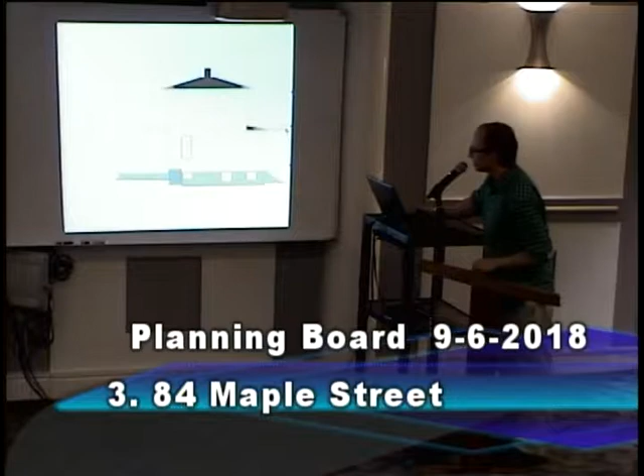Okay, we've got something. Looks like some of the grades here are washing out a little bit, but this is just a side view of what's being done. So there's an existing first floor addition, and the addition of a second floor master bedroom and bathroom, and this deck out the back, and the powder room on the first floor. And then this is where the lot is situated, this is what I noted around the house and its nearest neighbors.

Has this gone to the HRB or not? Yes, it's past the HRB. Really? Okay.

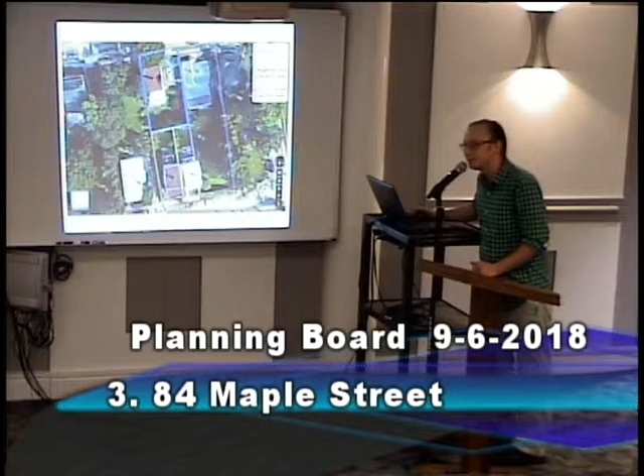All right, very good. Any comments from the board? Any comments from the public? All right, so I'm going to move that we close the public hearing. Second. All those in favor?

Thank you. So I have a resolution here I'll read. Village of Dobbs Ferry Planning Board Resolution granting site plan approval for the construction of an addition to an existing single-family house together with related site work, 84 Maple. Whereas Desan Davis and Ilya Bomash, owners, have applied for site plan approval to construct an addition and make related site improvements at 84 Maple Street, denoted on the tax assessment maps as section 3.90, block 51, lot 3, and located in the MDR1 zoning district.

Whereas the following plans and documents were submitted as part of the application, there's a list here of roughly 20 documents. Whereas the planning board is familiar with the site and surrounding areas, and the proposed improvement plans at the meeting of September 6, 2018, held a duly noticed public hearing and all comments were considered. Whereas the planning board has reviewed the staff report prepared by James J. Hahn Engineering dated August 29, 2018 for the subject application. Whereas the proposed improvement to the single-family property is a type 2 action under SEQRA and is therefore exempt from further environmental review.

Now therefore be it resolved that the planning board of the Village of Dobbs Ferry herein grants site plan approval for the subject application conditioned on the following. All applicable provisions of the village, county, and state regulations shall be met, and a site landscape plan shall be provided for review and approval of the village's consulting planner. Prior to the issuance of a building permit, all required site plan and engineering review fees shall be paid, and all items in the village consulting engineer's memo dated August 29, 2018 shall be addressed to his satisfaction.

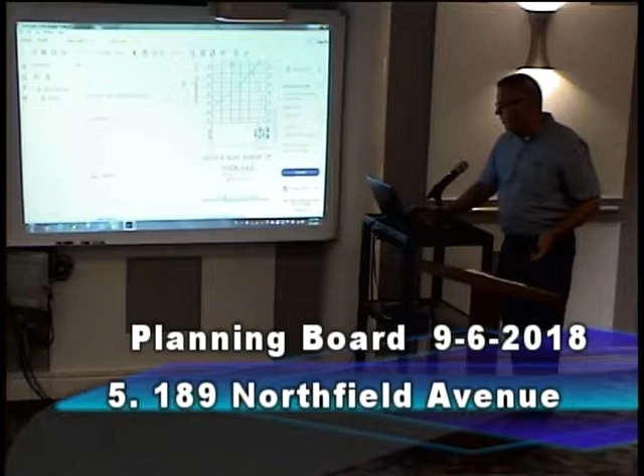But the overall grade of the driveway is definitely not steeper, it's about 10% less. And Mr. Chairman, the last part of that is the plateau or the platform, that's how you get in and out of the garage, and that's a concern. We're concerned that someone pulling into a garage at an angle that's pretty steep is pretty challenging, and then backing out on something that's pretty steep too.

While there's a section that is, like you've shown in your profile, very steep in the middle, that turning around area, we're concerned that the car can't really back up, turn around and pull forward again. One other feature of this plan is there is additional maneuvering space between here and here, because this edge of the driveway at the retaining wall provides more area, distance from the garage down to here. If you look at the existing plan, you can see the driveway is up here, down the road. The driveway's gonna be down here, so that we think would help that situation.

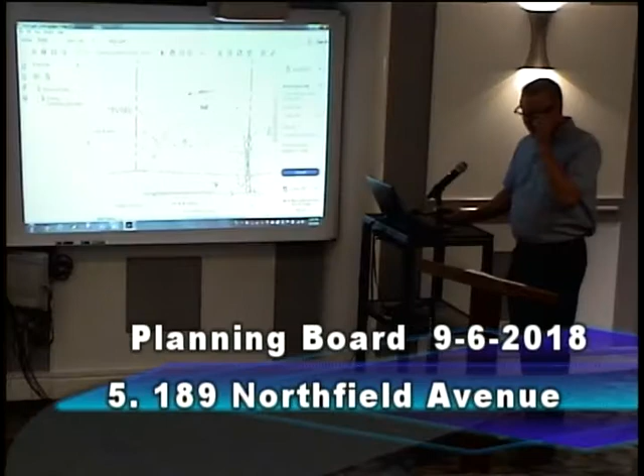I mean, George, that's the trade-off, right? You're trading the flat spot at the top for a lesser slope in the middle, which is the least bad solution, because meeting that 14% grade is not happening. That's well put, that's exactly it. And it's not ideal, I will tell you that, just being reminded of it tonight.

I've never seen a steeper driveway in this situation, this section right here, it's over 30%. And it's wet. I think they'd struggle to get up here, not even in snow, but just wet.

Now, what about the agreement with the village for the structures that are on village property, going forward? Yeah, we'll have to have one. Okay, but that hasn't been resolved. No, not yet. Any approval of this would be subject to the Board of Trustees approving an easement for the homeowner to maintain it, with agreements, insurance, everything like that. That would be subject to the board of trustees approving it, any site plan approval.

And I suppose the question of not getting to this garage has come up, just parking. Currently, they were actually parked in the garage tonight, but a lot of times we've seen them park here, but they understand that they will not be parking here, with the current situation, so it'll be too uncomfortable.

I mean, many houses have, you basically park at a lower level than the house, right? So it was built like this, and we're struggling with this, and I just wonder if it makes sense to continue trying to improve a very bad situation, as opposed to biting the bullet and putting a garage with a deck right at the street level. Yeah, and I don't think that's possible, the space is great, to put a garage at the street level. I don't see that at all.

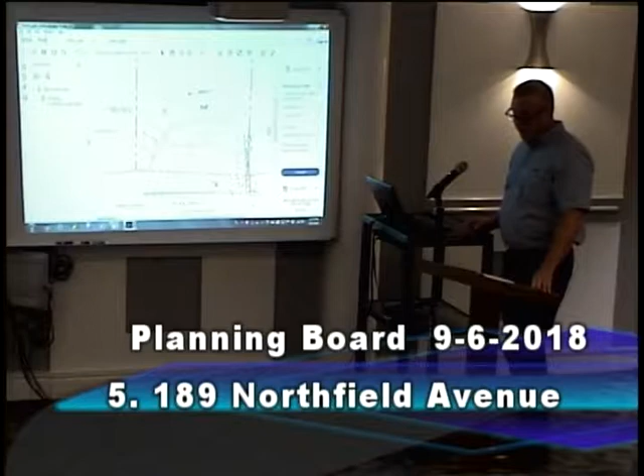When I first looked at grading, I said, you're doing a lot of work here, spending a lot of money, and it's still not gonna be that great. I explained to them how you're taking a very steep slope with a relatively flat upper area and using that to moderate the slope throughout. So you're not gonna have this flat area - you're just not gonna put a basketball hoop up there or anything like that. So the client's aware of the situation.

All right, so I think you've gotten some direction about some additional drawings and so forth. George, do you have any other recommendations? We're basically gonna just do a little more study till next time. Correct, that's what we would recommend, just because a couple inches or a foot one way or another makes a huge difference.

So if it doesn't work on paper, then trying to figure it out in the field is gonna be tough. And you probably would do some adjusting then too.

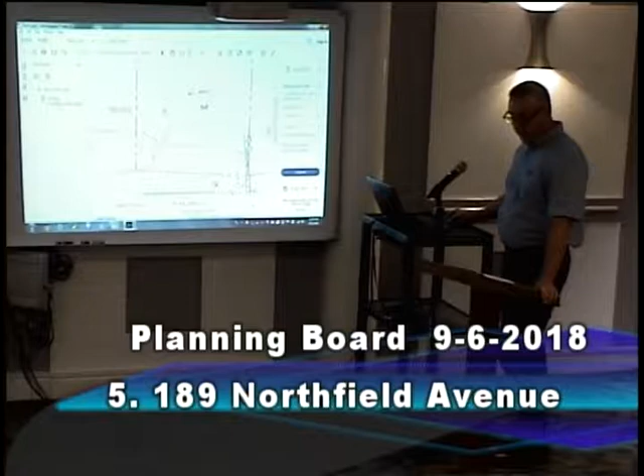So would the board consider a conditional approval as long as the village engineer is happy with the final grading up by the garage? We don't have a resolution, so I would go through one more step in the process - we can close the public hearing, so then it's just a formality for next time. So basically you'll be coming back, we'd ask George if he's comfortable with the stuff, and we'll have a resolution for you.

All right, so I'll make a motion to close the public hearing. Second? All in favor? We can assume that nobody from the public wanted to speak on this. All right, thank you very much. See you next time.

All right, our next item is 100 Main Street, continuation of referral from Board of Trustees for site plan review for proposed additions and renovations. So this is a pre-submission conference.

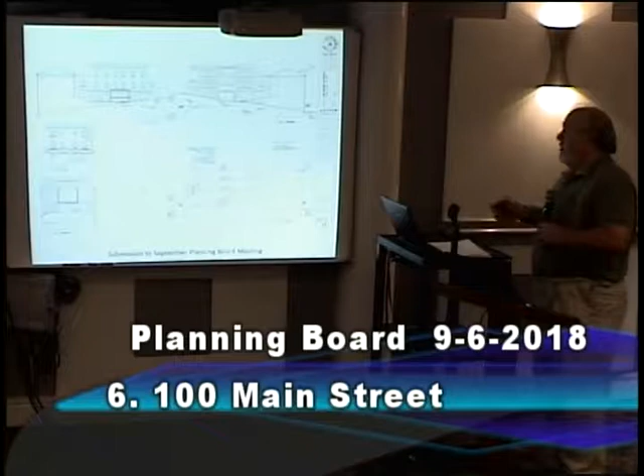We were trying to be pretty clear at the last meeting that we were not yet talking about any architecture. I know there were concerns expressed in terms of continuous facades, so there are things that can be done to break that down. As a point of reference, there are buildings on Main Street that are the width of these 3 bays right now with one facade that goes across.

On Main Street - right, it's on Elm Street, visible from Main Street, the Main Street address. So the idea of breaking it down to scale was why we did what we did with not having this be one structure. The idea is that we'll be able to go further with that once we have some idea of where we're headed.

Do you mind recapping the parking requirements and units?

We have 2 concepts laid out. One is for 3 residential units that are duplexes in the new building being added. There are 2 residential units in the existing building, so the lowest number we would have is a total of 5. Those 3 units are larger 2-bedrooms in the proposed new building.

The other alternative is that we would do 4 units in the new building with 2 2-bedrooms and 2 1-bedrooms. So we know what the needs are in the community - are we doing a better job with more smaller units, or with 3 larger units? It does trigger questions about parking.

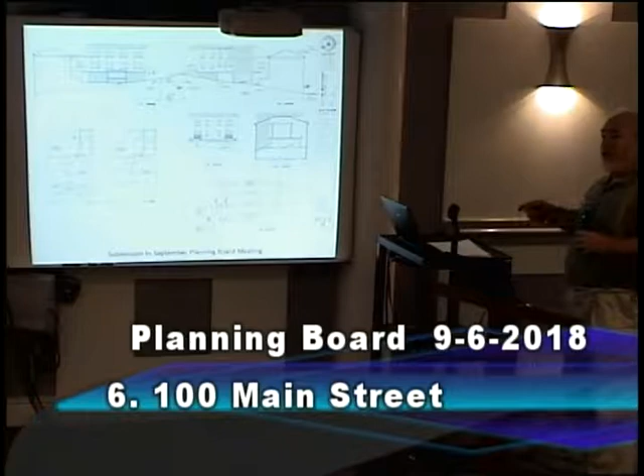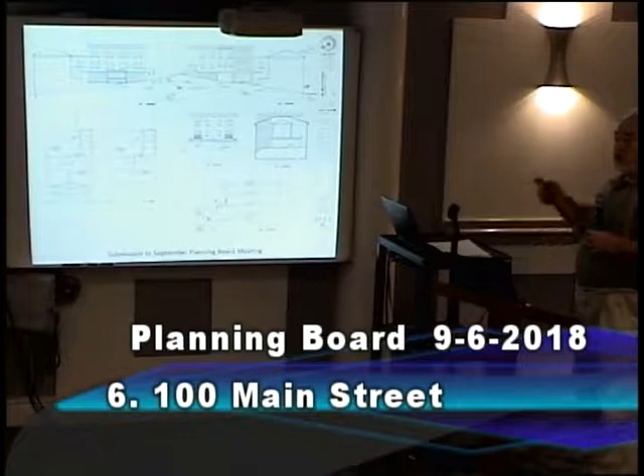Parking requirements right now are 1 space per unit plus 0.25 spaces per bedroom. So if we have a total of 5 2-bedroom apartments, we need 5 parking spaces for those units, and then we have 10 bedrooms, so we would need 2.5 parking spaces, for a total of 7.5, which gets rounded up to 8. That would be the requirement for that.

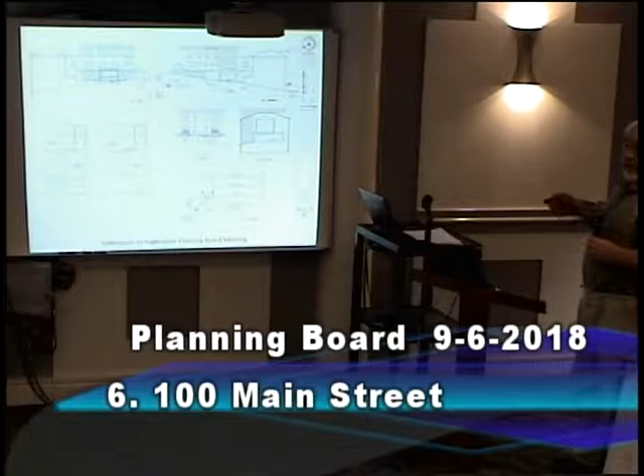If we go with a total of 6 units - 4 in the new building, 2 existing - we need 6 parking spaces for those units. We actually have the same 2.5 that we would need for the bedrooms, because the number of bedrooms stays the same. So we would end up requiring 9 parking spaces.

What we have right now shown on the site plan is... just a second. Ed, you mentioned something about the existing 3 spaces that were there, and I think in Patty's letter he mentioned something different. So I just wanted to resolve that.

It was my opinion that there were 3 existing spaces which need to remain, and then we need to also add for anything required for the new. So that's my calculation - I'm not arguing anything with that.

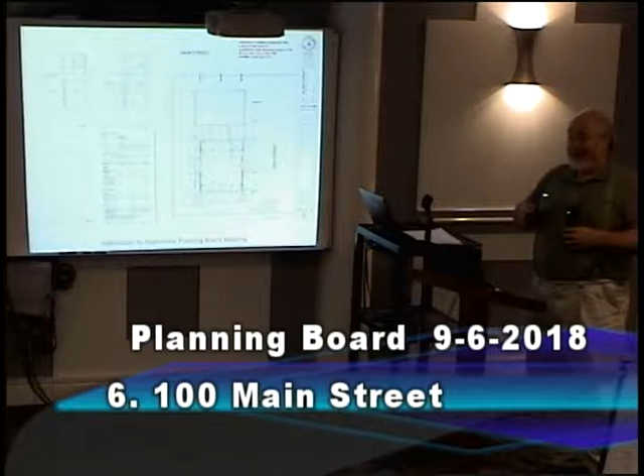If you look at things in a kind of legal way, the people who park there don't have the right to park there. The reason that was paved is for the back building - this is all history on it. The reality is, we need parking, and ignoring those 2 units and saying they don't factor into it, I don't know that that does us any good.

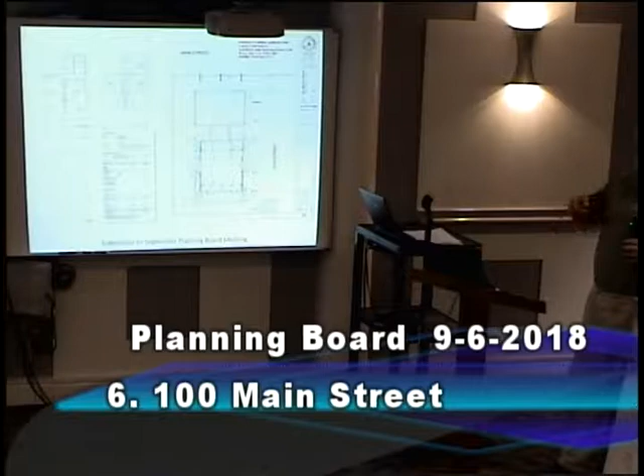How many parking spaces are you allowing for the 2 existing units? What we're basically doing is saying we need to have a total of 3 parking spaces for the 2 existing units - 1 for each unit, plus 1 because there's 4 bedrooms. So the count comes out the same? Well, we've included that in our count - we've included it as though we were building those today.

Correct. There's a section in the code that specifically says you don't have to provide parking for existing units, but we're just ignoring that, because we think resolving the parking for all the units there is a better road to take. So we either need 8 spaces or we need 9 spaces. We're showing a total of 7 spaces on site.

And then what we would be doing is going to the village, which has 2 choices of what they can do. They don't have to do this, but they could allow payment in lieu of parking.

Yep. They could also - we have 6 parking spaces adjacent to the property, and there are provisions in the code that allow you, if the Board of Trustees agrees, to count some of those parking spaces towards what your parking requirement is.

So if we had 7, we required 9, you know, maybe they'll do a split, I don't know - maybe it's one of those King Solomon things, of that half. And require 1 pay-in-lieu and allow us to use 1 on the street, or maybe they'll require 2 pay-in-lieus, or whatever it is - there's a mechanism there for it.

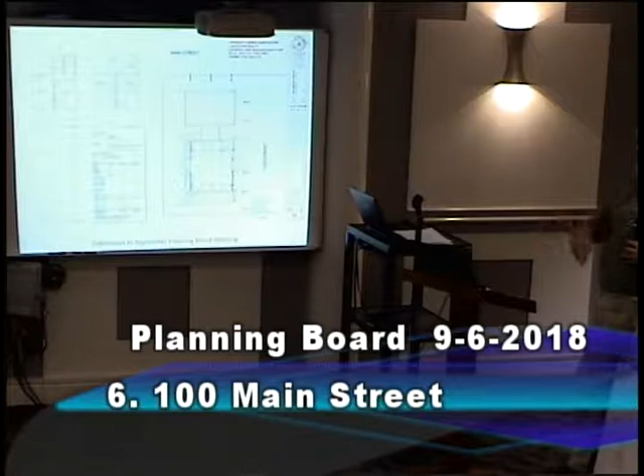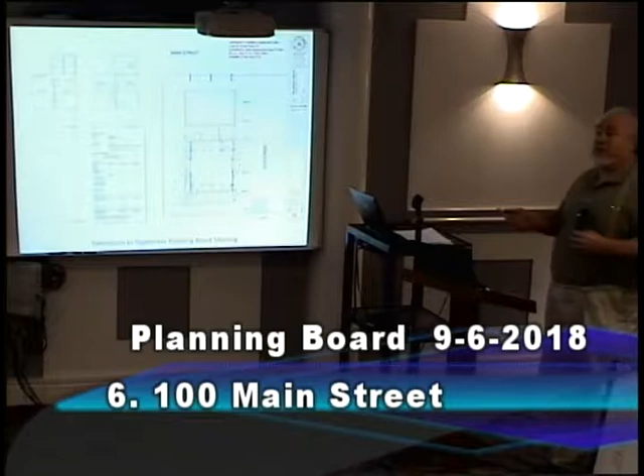One of the reasons we're thinking it might make more sense for the 2 one-bedrooms is we're finding that one of the things that's gotten very attractive about the one-bedrooms is it's people who are specifically living downtown, so they don't have to own a car. We're adding Zipcars to Dobbs, so I think that's the kind of direction we're going, which is a good one - less auto-centric if you're living downtown.

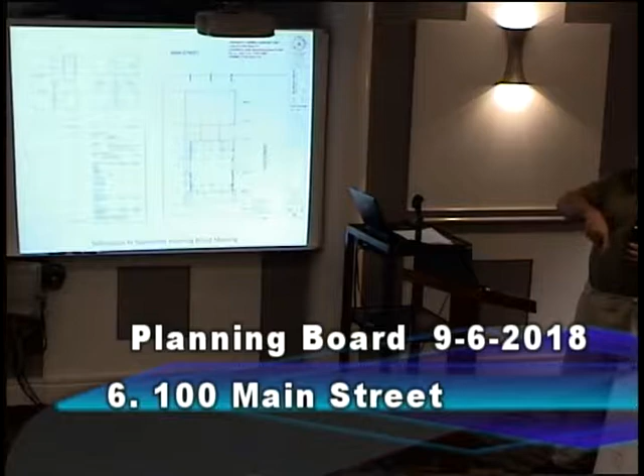So the idea that we would have 7 spaces - and I'm not disagreeing with anything - but this was something that was changed last April. Before last April, the parking requirement here would be 1 per unit: 5 spaces or 6 spaces, and we have 7. So when we presented this and did all that originally, we were compliant.

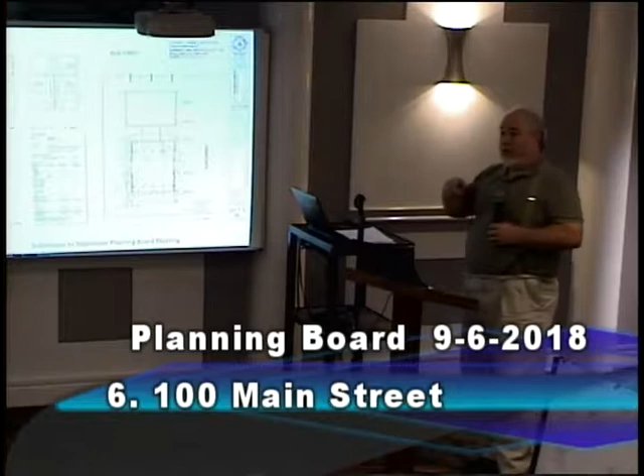We now need consideration of the village, but that's something we need to take into consideration and make a recommendation. Maybe you're against it, maybe you're for it - that's not my choice, it's yours. I am going to get to a next thing though, which suggests fewer parking, which is then going to lead me to ask a harder question.

Maybe returning to where we were in 2014, looking at the complaints people have had - one that still resonates is people think it would be good to keep the existing garage structure rehabilitated. Can't be done if we have to have parking. If we had no parking on site, we could do it, but let's get to that first.

So what we did is we looked at and worked out two ideas to cover the parking - one with a green roof, one with a trellis roof, both of which would obscure what you're looking at from up here.

I think there are lots of ways this can be made good in terms of design. The idea is, yes, it's definitely a Main Street property, and we're carrying that - we're not trying to make it look like the houses up the street or something like that.

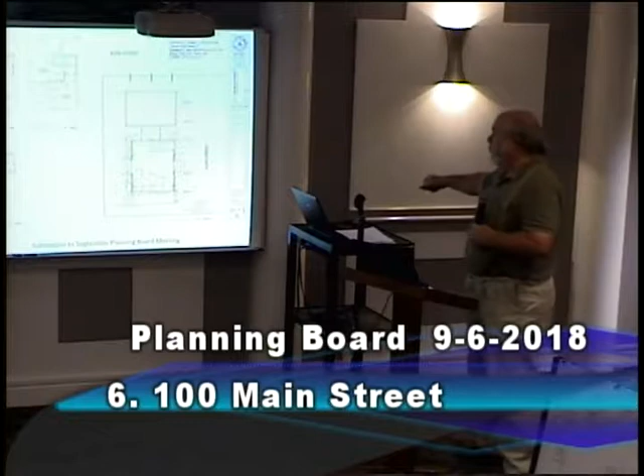What we also looked at was the idea of having only 4 parking spaces, with nothing projecting past the edge of the building, so that this wall of the building would conceal the parking. So it would be 4 interior parking spaces, that rotated the stairs, so we have a very different massing.

One of the comments last time was having 3 windows in a front that actually accommodates a staircase - well, I personally think it'd be very nice to walk up the stairs and have windows and light. I think the concern was it looks like it could be somebody's bedroom, but it's actually just a staircase. I would rather do that myself, but again, not my call.

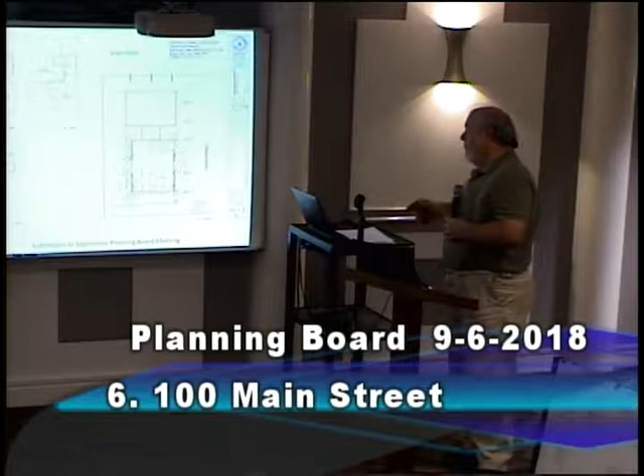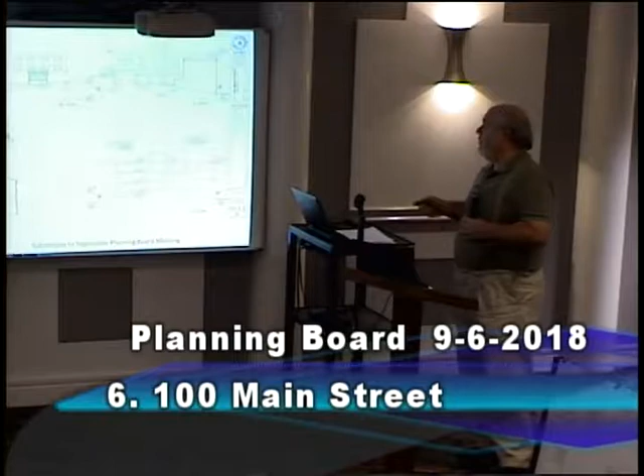So this rotates the stairs, making a difference in how this masses out, which could address the concerns, and we intentionally kept this stripped of any cornices or material details. We're showing rectangular windows - I didn't even intend for them to put in that these would be double hung. I think they just did it because it was already there.

The idea here is a massing one. One of the nice things here is that if this is 4 units, this stair can go to the roof - you could have a usable roof for the people living there. And that breaks the massing. It has a very different feel than what the other one did, which, if that is a concern, I think this solves.

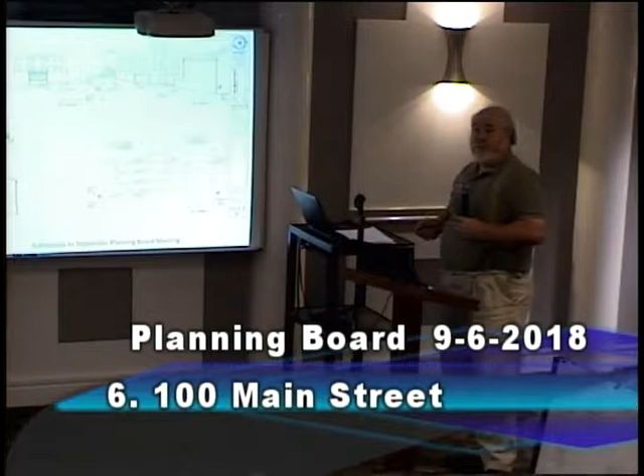This would only have the stair in it, with no habitable space. So my understanding is that I can have a staircase that goes to a roof and penetrates the sky exposure plane without an issue - but that's for others to decide, not me. For example, 2 Ashford Avenue has a staircase that goes up above the roof, which we're required to do by the state.

So when we looked at this idea of having the parking in here, one of the questions it begs, of course, is what becomes of this? And when you walk along the lots along the aqueduct that don't have a building there - probably 2/3 of them have a building - the ones that don't, that area kind of becomes a backyard that gets stuff dumped in it.

So one of my concerns is, do we do something with this that makes it better? There is a retaining wall here that's original to the aqueduct, so I don't think the solution would be to fill this in and obscure that wall. I think the idea is to open that up, but it might be possible to have that actually be a place you could go and look at the wall, landscaped nicely, almost like a little sitting area off the back of the building.

So what this triggered in my mind—I admit I'm tired, nobody needs to say we did this last night—is that if we're down to 4 parking spaces, and there are these concerns about massing and how things work, if we got to a point where there was no parking on this site, you could look at a whole bunch of different ideas.

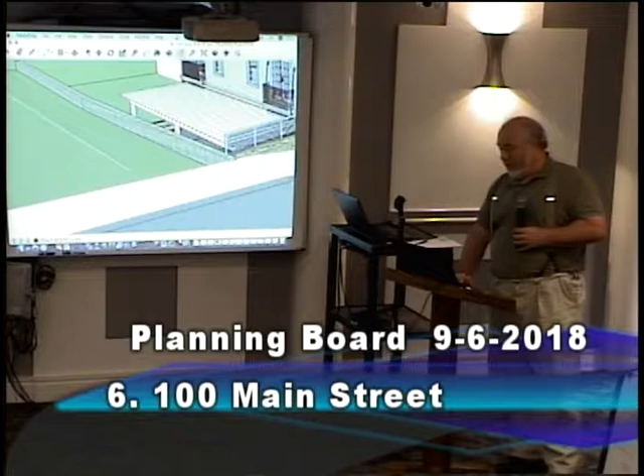Well, there's a third option: the planning board may want to recommend that they want to see if the ARB is in line, not looking for advice from them, but seeing if they're on the same page, or maybe they have something better. Or a joint meeting - to streamline it for you. I think that's the joint purpose. Meetings are encouraged in situations like this, by the code, not by the board.

Thank you for making this model, by the way. Well, this isn't the model, this is just a sketch of the thing. Once we have some idea of where we're going with this, we will build a nice 3D actual model. Anybody who's been to my office knows how much I like this.

So what's that, Chestnut, right? This is Elm Street, yeah. So basically, the idea of - I don't know why this won't pan back - having the trellis out the back, I think that does do a lot of stuff. I think it's viable to get something to work with this.

I really don't agree that this is Elm Street, not Main Street. I think this is a Main Street property, very visible from Main Street. One of the things that's nice, often when you're walking down the street, is the buildings have depth, and you see that side of a Main Street building. So that was part of our thinking on this. But this has no similarity really to the Main Street building.

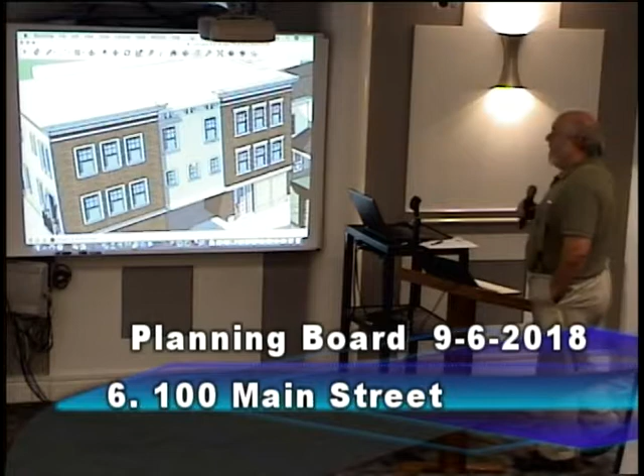Are you talking about because we showed brick instead of stucco? No, I'm just saying whatever you're showing, you haven't shown us anything that really tries to make this one continuous property. I was chastised and beaten to a pulp because I did that - I was told I was trying to make a building that looked too massive and too homogeneous, and that I should be trying to find ways of breaking it down. This board and the architectural review board said that, so I've taken that to heart.

My point is only that you're making it look like what's on Elm belongs on Main. To me, it's sort of contrary.

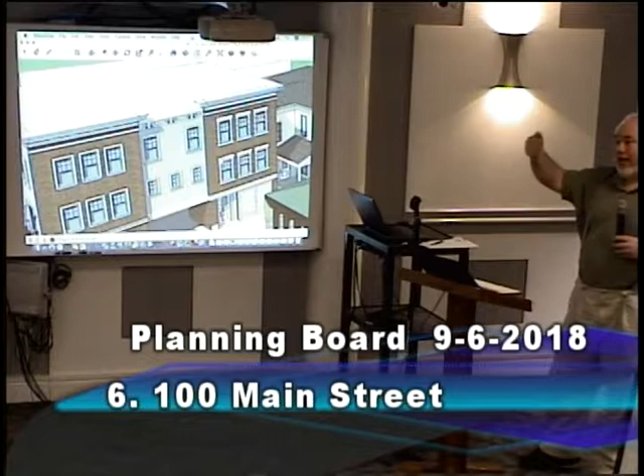Contrary, because this model for what you've been talking about—the cornice building and the verticality and so forth—to me looks like something that belongs on Main, but you're saying you see this as one project. So I don't see the building you currently have on Main as seeing this as one Main Street facade on that section between the aqueduct and Main Street, as opposed to trying to make it look more like the houses on the other side of the aqueduct. Right, so the idea is...

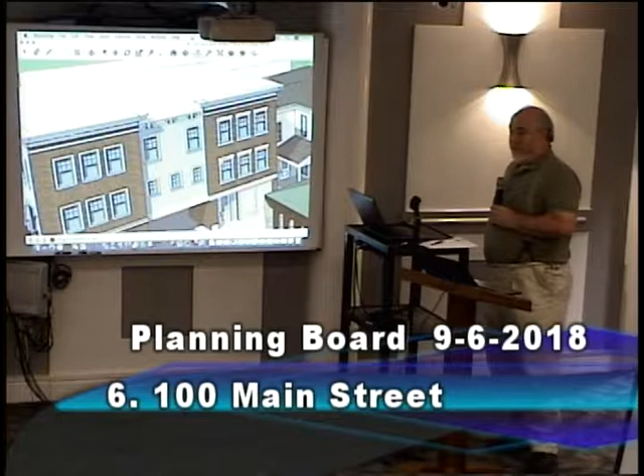To be clear, I'm not proposing that it look like what's on Main Street. I'm just saying it seemed where you were going with this was that you see this thing from Main Street, so it should look like it belongs on Main Street. But it's not on Main Street.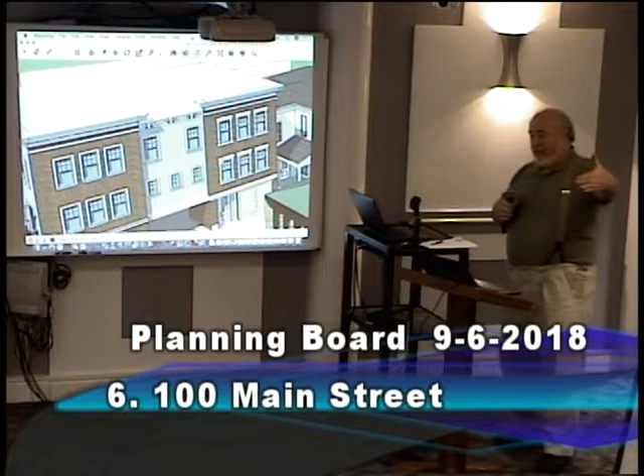Okay, maybe I'm not understanding it. I'm saying that when I walk by on Main Street and look at buildings between the Aqueduct and Main Street, I'm looking for a Main Street style building, and I can show you six buildings within half a block that look just like that. So it's not that it looks like the front building, but more like the front building and the building next door, to break down the scale of the massing—which was something, when I went back and watched the videos on 78 Main, this board heralded as the decision made.

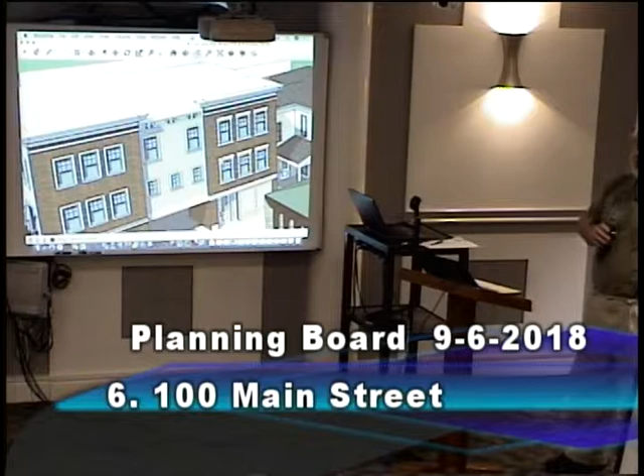So I personally think this works better than that, but it's trying to do the same thing. It's taking a facade that's 50 feet long and showing it as three components, so it's a very intimate scale structure.

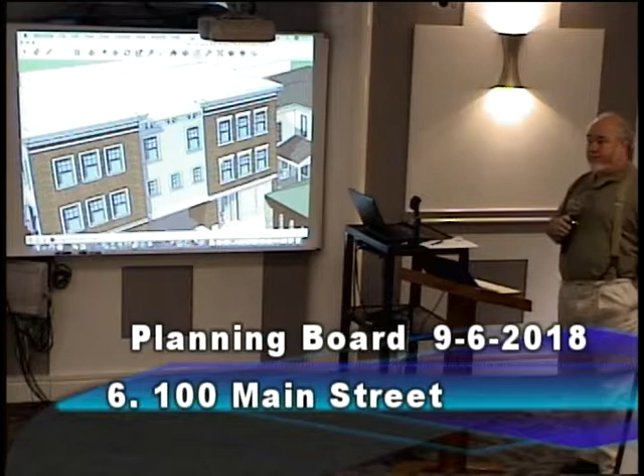I'm just curious, I'm lost again in terms of what the way forward is here. What is it that we... I think there are a couple things we may be ready to say or not. From hearing your discussion, I think we've taken our guidance from the Board of Trustees that the idea of no parking is not acceptable—we're going to have parking. Right, and the second thing we started to talk about, I think, is from the standpoint of the aqueduct...

The view from the aqueduct must be screened from any parking that would project out from the building and be visible, so we were very interested in what an attractive type of screening of the cars that project out within that 10-foot setback from the wall could look like—what would be a creative solution to that. I don't know if everybody agrees, but it sounds like we might. So we could say to the applicant: work on the assumption you're going to produce the parking, and those spaces that project out are going to be screened. I was assuming some vegetation would be included in that type of screening, not just a straight awning like you were starting to show before, but some sort of plantings that could look attractive from the aqueduct. And we would need views from the aqueduct showing what that would look like if you're standing on the aqueduct toward the back of the building.

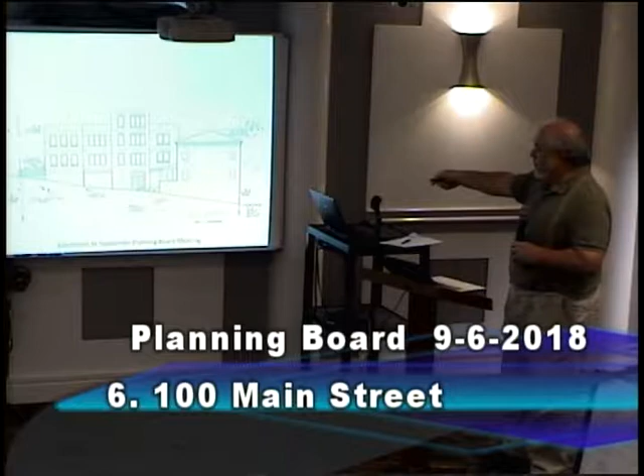So I can still go up with a parapet to extend that. So you have an angled parapet, going from, we'll say, below the top of the windows—and the windows are treated as dormers—and it goes up near the bottom of the top windows, lower than the top. The windows are basically in dormer form. So your mansard would be running along here, sloping up to this height, which looks like it's coming in about the right side and cut back.

Yeah, my only hesitation in doing that was we got so fried for having... but we're talking about three buildings. Ultimately, we're talking about getting a direction between the two boards, right? So what I think you're talking about is what would be considered a detailed design.

If you said take this off, I think that's a nice idea but not necessary. This is basically what you're dealing with: you've got this rectangular box that fits on the site and meets the code.

So how do you then articulate that so it doesn't look like a rectangular box? What we've done is suggested a bay system so this looks different than these two, which gets the setback - this sets quite a bit back, so I don't think it's an issue. But you can go from that to the most horizontal and modern of designs, or to a very traditional 3-story building like we have on Main Street.

You can go to where this becomes a mansard, and that could be - this is how this would look, this is how this would look, this is how this would look.

One of the things that's caused confusion over the last 2 years - when we talked about having co-meetings, and when this board had a co-meeting with the Architectural Review Board back in 2015, the goal at that point was not to expedite us through a process. The goal was to try and find a way that, since both boards dealt with massing, of it coming together where everyone agreed.

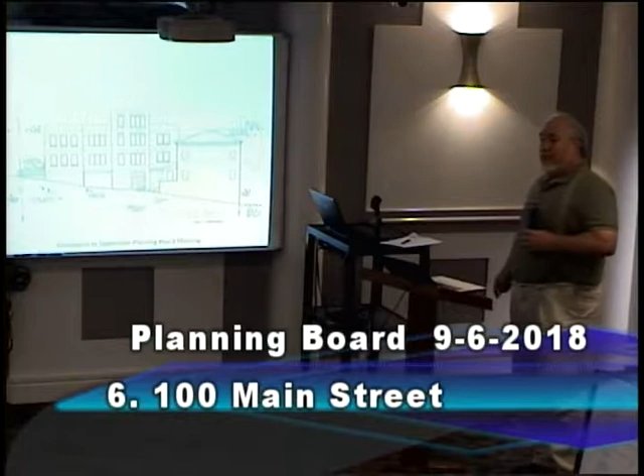I think we've advanced that at this meeting, so I think the goal is exactly what you said, but you ultimately need to bring something to the table, and the more options the better - well, not 2 or 3, but the more options the better. Because I've heard other people saying the problem is that we're showing too many options.

I'm just saying my suggestion is you have an A and a B, and we get a reaction, and that'll get us to something. If you're going to follow your thinking, I think you have an A, B, and C.

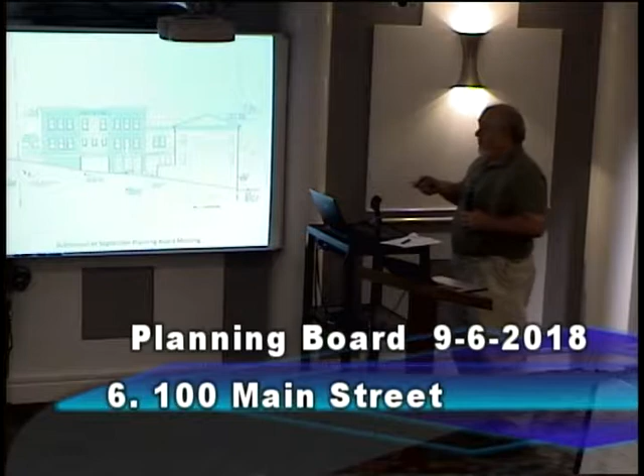I think you have this as one concept, which is kind of a proportioned vertical component similar to what you see on Main Street. The other one would be - maybe you don't have the notch, maybe this is very horizontal, maybe we even go - at that point I don't know if it can work with the parking, I'd have to check - but can the stair be a thin element that is turned the other way, so it feels like there's a thin element and a more linear horizontal element.

And then, as you laid out, the third could be what happens if you actually do a real mansard here, and you've got this bottom line of the trim - if you carry that bottom line of the trim as a band beneath the mansard.

Tony, just to be clear, I'm not saying mansard. I mean, I said mansard so you get the idea, but that's not what I'm proposing. That's like saying Ford but meaning Chevy - it's the same. So are you not saying mansard?

No, my point is that it's not a full roof that comes to a peak. It's basically a sloped roof with dormers, except it stops at 43 feet, and then you have a recess, and you're basically using the detail. It goes up, it goes down. So I don't know if that's gonna pan out. My point is that it's a divergence from this, and I think the idea is instead of looking at it from Main, you're looking at it from the aqueduct. What is the right thing to be looking at from the aqueduct?

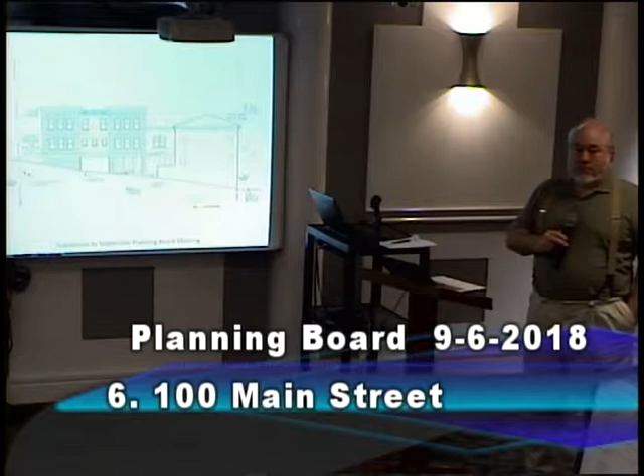Those are one issue for you, though - are you saying that's enclosed if it's a trellis? Well, doesn't it have to be? Well, we may make that determination. That's issue number one, but that's something. That's why we showed you two options.

Issue number two is the massing of the building, which I think the board indicated some suggestions to you, whether you want to proceed with it, you could proceed with two different ones. And they indicated they would like you to go to the ARB. If you don't want to go, that's up to you also. I think I heard, and maybe I'm reading into it, but what I heard was the idea of a joint meeting, and potentially, I think that would be where to start with this.

I wouldn't say that's where to start. I just was thinking the board here is entitled to see some of their suggestions first. I think the next meeting hopefully would have more of a rendered architectural treatment, along with the other things they've requested about the parking, how it's going to be screened, ideas about the screening. Those things should come to this board, and from that October meeting, then it would be appropriate to say we're seeing some good stuff here, or not. I think you all should have some sort of opinion about what's the direction for the massing and treatment of this building should be, as you're referring to the ARB.

I don't think going in cold with nothing - nobody likes anything so far, it didn't seem. No, I feel strongly that whatever goes there should step up the hillside, like a million good streets I've seen in my life, and nothing we've seen so far does that. And certainly Steve's properties across the street do exactly that. So that's my personal opinion.